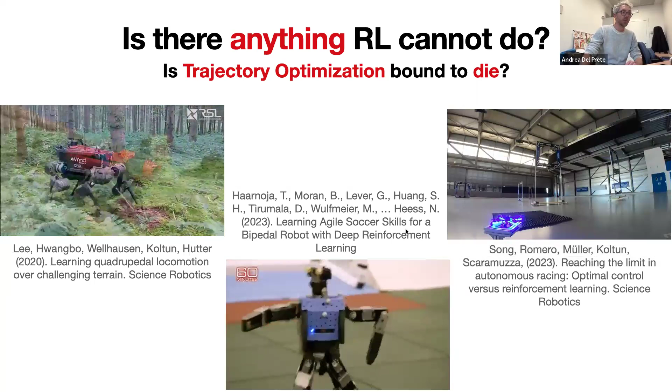I think that in recent years we have all been amazed by the new results achieved using reinforcement learning techniques applied to robotics. Here I'm just reporting a few examples of quadrupeds, bipeds, and quadrotors performing amazing maneuvers, demonstrating incredibly fine motion skills. All this has been possible thanks to the application of reinforcement learning and offline simulation for training control policies offline and then deploying them on real hardware.

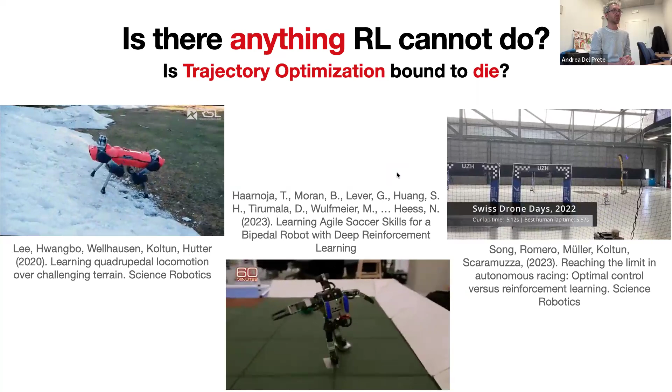So I guess if you, like me, have been working most of your career on model-based control, maybe you felt like, okay, is there anything that reinforcement learning cannot do? And what's the role that trajectory optimization can have in this new world where it seems that RL policies can do just anything? I've been wondering about this for quite a bit now.

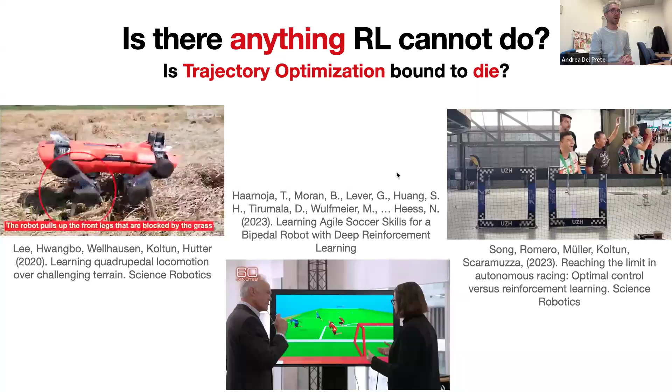My conclusion is that there are still two aspects where reinforcement learning is really struggling and where we, as model-based people, can say something and help. One is the lack of efficiency. These RL policies are trained using lots of data, lots of compute, which requires lots of energy, and depending on your hardware, maybe also lots of time. Instead, we know that trajectory optimization is way, way more efficient.

Indeed, we can do these trajectory optimization problems even online when we do model predictive control. Another aspect is safety, because these RL methods typically do not account for constraints, or account for them in a very loose and relaxed way. So in the end, we get policies that we cannot really trust because they don't give us any guarantee that constraints are going to be satisfied. And if you're deploying your policy on safety-critical applications—and I would say most robotics applications are safety-critical—then that's something we're not really at ease with.

So ideally, I would like to have a policy I can trust, one where I can somehow certify that in certain situations everything is at least going to be all right and constraints are going to be satisfied. My research in recent years has really focused on this question: can we use ideas from trajectory optimization and model-based control in general to make reinforcement learning policies both safe and efficient in terms of sampling, energy, and time? Those are going to be the main two topics I'm going to discuss today, and I would like to start the discussion from the issue of safety, which is very dear to me.

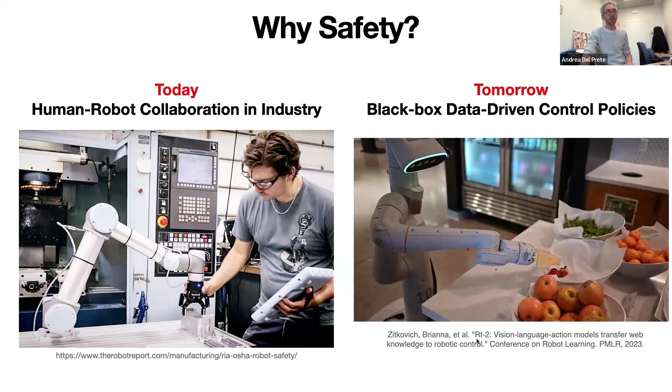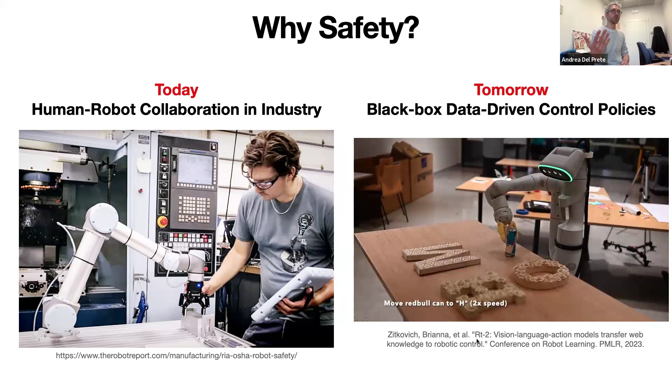I don't think safety in robotics needs a lot of motivation, but just in case you want some: even today in factories, we have humans and robots collaborating on a daily basis, so they need to be in close proximity, and you want the robot to behave in a safe manner. If you look at more distant future prospects, we might have black box data-driven policies performing tasks driven by human natural language commands, and you want to make sure the behavior of the robot is always safe—that it does not collide with the environment, does not damage itself, does not collide with humans who may be sharing the environment with it, and so on and so forth.

So when it comes to safety, I think that the main tool that we have been using in robotics, which comes from control theory, is the concept of control invariant sets. Typically we model the robot as a dynamical system, which is nonlinear, and we typically model it in discrete time because that's a bit easier for doing trajectory optimization.

So we have the discrete time dynamics f of x, u, which gives you the next state. And we know that the state and the control inputs are typically bounded to stay within certain sets, which represent all the constraints that I was mentioning before.

So if you want to ensure that your system is safe and you want to be really certain that you are safe, the main tool we have at our disposal is using a control invariant set or some variants of such sets. So a set V is a control invariant set if once you're inside V, the state can remain inside V forever.

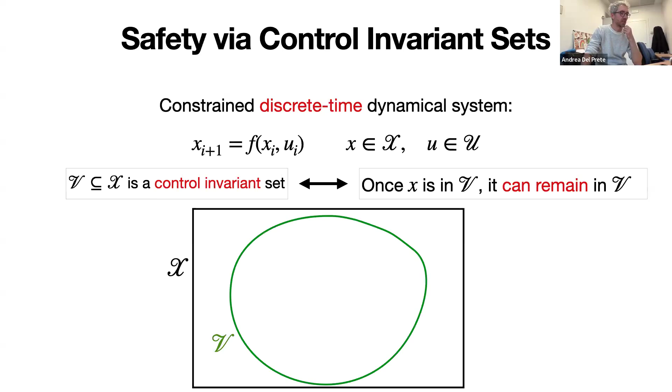So if we want to draw it, just to have a more pictorial image of it in mind: if X is our feasible state space, this black rectangle, V is our control invariant set, which is this green set, then we know that as long as we are inside this set V, we can always remain inside. Maybe you can also enter inside V if you start outside, but that's not guaranteed.

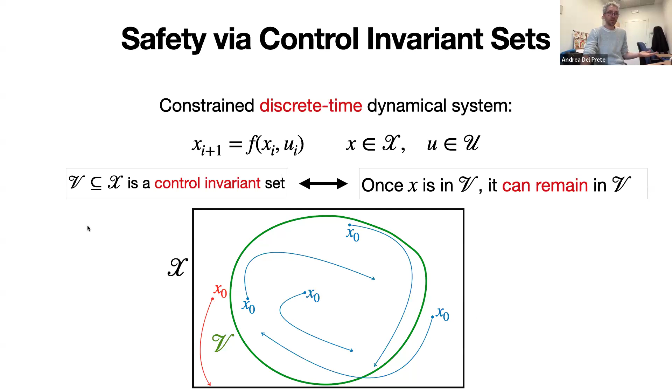And we have several books and papers on MPC which tell you, well, if you have a control invariant set and you add it as a terminal constraint in your problem, then you have guaranteed recursive feasibility. So your MPC problem is always going to be feasible.

So if your solver is good enough, then you're good. You're always going to satisfy your constraints, which means that your system is safe and that can be guaranteed.

The problem is that, I guess, if you know this theory of recursive feasibility of MPC, you already know that the problem of this theory is that having these control invariant sets is extremely hard, except for the simplest cases, which are the cases of linear systems subject to polytopic constraints.

So if you have a nonlinear dynamical system, like a robot with nonlinear constraints, then there is no way you can compute exactly one of these sets. The best you can do is compute an approximation.

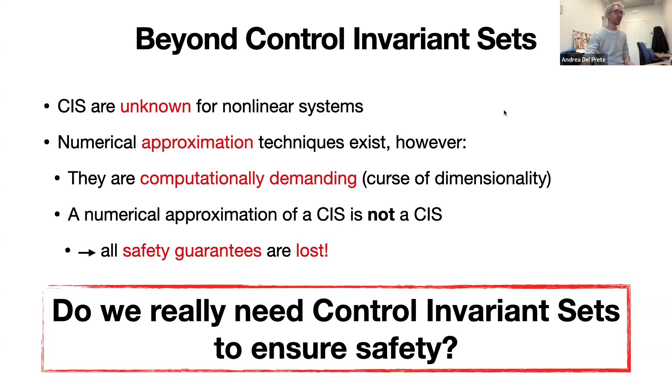So we should try to find other kinds of safe sets which have weaker requirements, so that they are easier to find. And we should then find control methods, control schemes that can still guarantee safety even using these easier to find sets. So one example of such a set that I'm trying to promote is an n-step control invariant set.

Which you can think of as a generalization of a standard control invariant set. So if a standard control invariant set is a set so that once you're inside, you can remain inside forever, an n-step control invariant set, and here you have the definition, is a set so that if you're inside it at time 0, then it is possible to come back inside it at time k for k between 1 and n.

So maybe you cannot remain inside it forever, but if you leave, it's possible to come back within a horizon of n steps. Clearly, this is a weaker condition than classic control invariance. And what I'm going to show you in a few slides is that even with this weaker condition, it's still possible to guarantee safety in MPC if you use a modified MPC scheme.

But first, I'd like to spend a few words about these n-step control invariant sets. Let me show you an example. Suppose you have this black rectangle, which represents your feasible state space, and then you have this green set, which is a control invariant set, but that you don't know how to compute. But you find an approximation to this set, which is this red set V hat. So this set V hat is an approximation of a control invariant set, and it is not control invariant itself.

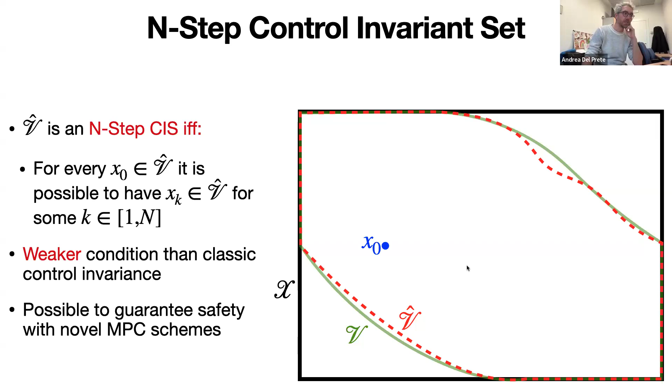Why can we say so? Well, because if we start inside V hat, we may reach the state xi, which is still inside V hat. But from xi, no matter what we do, we cannot remain inside V hat, we are forced to leave the set. But the good news is that if we take another step, after 2 steps, we can come back inside V hat. So in this example, V hat would be a 2-step control invariant set.

Let me show you another example. Let's take a very simple dynamical system, a double integrator with position limits and velocity limits. Here we can see in light green this rectangle, which represents the feasible state space. Then you have this darker green shape, which represents the largest control invariant set. Suppose you want to find a control invariant set that is a circle. If you do that, the largest control invariant set you can find for this system is this one. If you make it any larger, it's not control invariant.

But if instead of using control invariance, you use n-step control invariance, you may find a larger set, like this one. For instance, this circle, which is larger than the other one, is not control invariant, but it is 65-step control invariant. We can see, for instance, that if you start from this state here on the boundary of the set, you can come back to the set in 65 steps by following this black trajectory here.

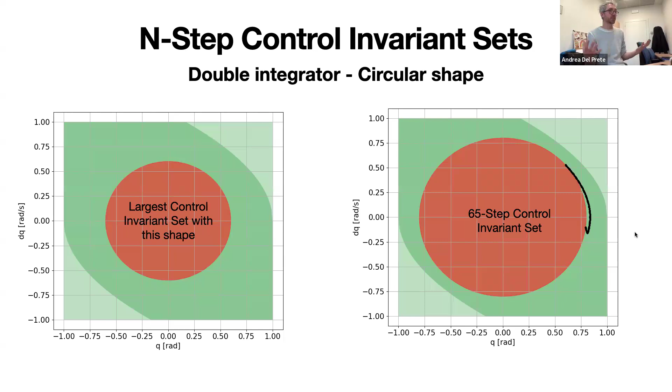So switching from control invariant to n-step control invariant may allow you to find bigger sets. And even more importantly, you can have cases like this one, where for the family of sets, for the parametrization you're trying to use, there exists no control invariant set belonging to that parametrization. For instance, for the same system, if instead of using a circle we use a rectangle, there exists no control invariant set with a rectangular shape. But if you look at n-step control invariant sets, then they do exist.

For instance, here we can see a rectangular set, which is a 47-step control invariant set for this system. So maybe you find a bigger set, or maybe you find a set in cases where there did not exist any set with that shape that was control invariant.

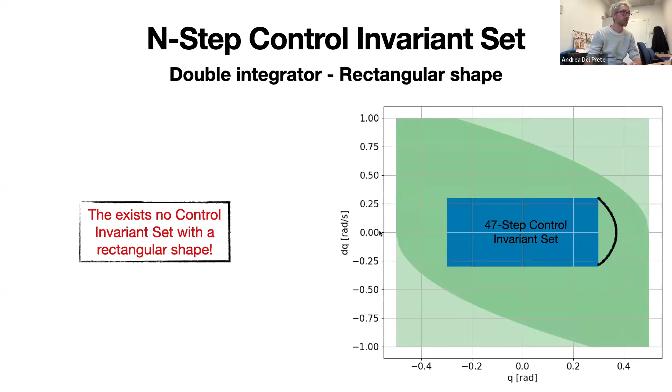So now that we have seen a couple of examples motivating why this kind of set may be a better choice for ensuring safety, let me discuss a couple of MPC schemes that can work with these sets, giving you strong safety guarantees. The first one I want to discuss is this receding constraint model predictive control, which is an idea that we presented this year at ICRA.

Let me show you how this works with an illustration. Suppose you're at time step 0, and you have a hard terminal constraint represented by this red circle here, which forces the last state of your MPC horizon to be within a given set. So you predict a trajectory which ends in that set. Then you execute the first command, which makes you reach the predicted state x1.

And then you ideally would like to repeat this process over and over. The problem is that if your terminal constraint set is not control invariant, and you keep using it as a terminal constraint, at a certain point your problem may become unfeasible.

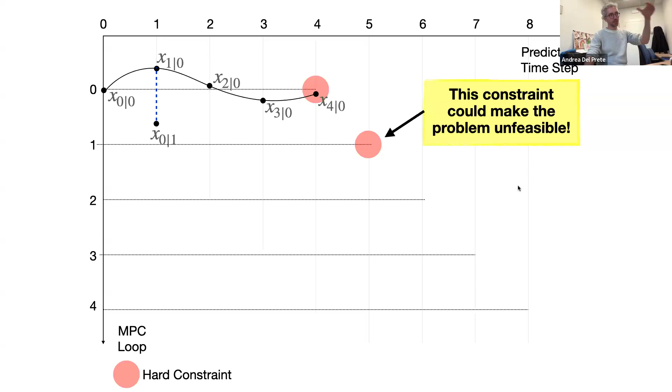So what we thought would be a good idea is, let's not keep the constraint on the terminal node of the horizon, but let it recede along the horizon. So if we move it backward by one time step, then it's at the same absolute time it was before, which means I can be sure that this constraint is feasible, because I already have a solution that reaches this set in that horizon.

So I can keep shifting the constraint backward as I keep moving forward along my MPC iterations, being sure that I'm always feasible. The problem, if I do that, is that eventually the constraint recedes, and it reaches time 0, which is my current time, and then it can no longer recede. So we need to add something to make this a tractable approach.

So what we did is we introduced a second constraint, a soft constraint, which I'm going to represent with a light blue circle, and I'm going to use that as a terminal constraint. So I have my hard constraint that recedes along the horizon, and I have a soft terminal constraint which remains always there. Whenever it's possible, the system satisfies the terminal constraint, but if it's not possible, it's going to violate it. For instance, in this case, the terminal constraint is violated, but that's not a problem because it's a soft constraint, so the problem is still feasible.

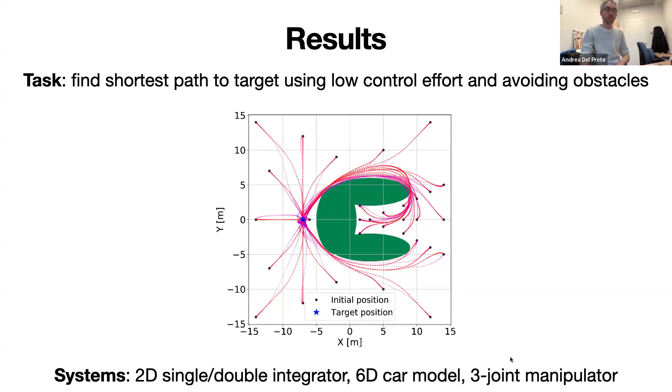We repeated this test for many different initial states and the four dynamical systems described before. We tested how often initializing trajectory optimization with the policies computed by our algorithm resulted in better behaviors than initializing with random values, or with the initial states of the system. It turns out that in the vast majority of cases, our initialization was much better than using either of these two standard techniques.

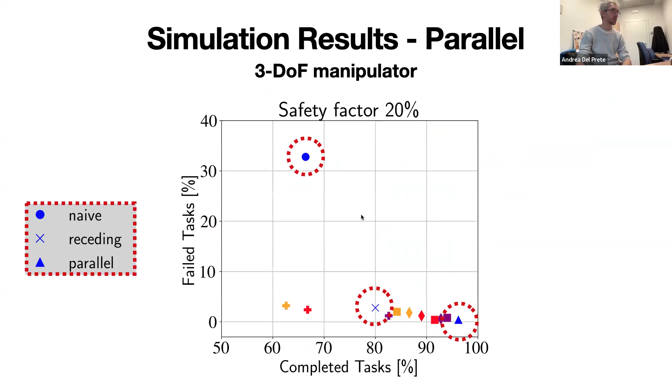So actually, I think the most classic approach for safety filters is to use an MPC. Let's take this one - you use an MPC exactly like this one, but the only difference is that instead of having a cost function that really represents what you would like the system to do, the cost function is simply trying to minimize the difference between U0 and the control input given by the RL policy, which you want to filter.

So basically, you're trying to check whether the action computed by the policy is still compliant with all these constraints, which represent the safety constraints. So as soon as you have an MPC formulation which has some safety guarantees, you can immediately get a safety filter just by changing the cost function into the function I just described.

So you can do it with the classic approach where you have a terminal safety constraint, but you could do it as well with these receding constraint or parallel constraint approaches that I've presented. It's just a matter of changing the cost function, basically. So in terms of methodology, you don't need to change anything - it's just a different application of the same idea.

Yeah, okay, makes sense, thank you. I have one question - would there be any idea of combining these two together? I know you talked about the actor feeding into the trajectory optimization, and if the trajectory optimization happens to be the safe MPC, would we still guarantee that CACTO can produce safe and always feasible outputs?